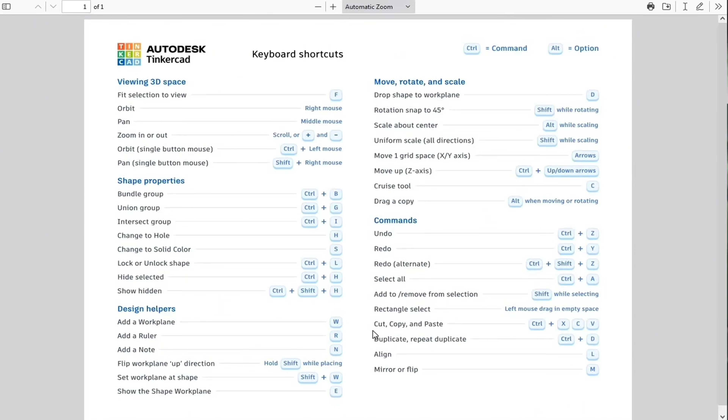Now I noted right now, the new Measure tool is not on here yet, but I'm sure it soon will be. This is a very handy thing to have under your keyboard. It will show you all the different keyboard commands. That'll make working in TinkerCAD quite a bit faster. Let's jump back to TinkerCAD here. Let me show you what this new Measure tool is all about.

Let's go ahead and get rid of this text here. So I have a number of different objects here on the workspace. Now I think some of you are familiar with the ruler tool up here. And if you place the ruler tool down on the workspace here, it provides a lot of flexibility and functionality as far as measuring different things. I did a whole 4 or 5 part series on some of the different things that you could do with the ruler tool, but the Measure tool is a little bit different.

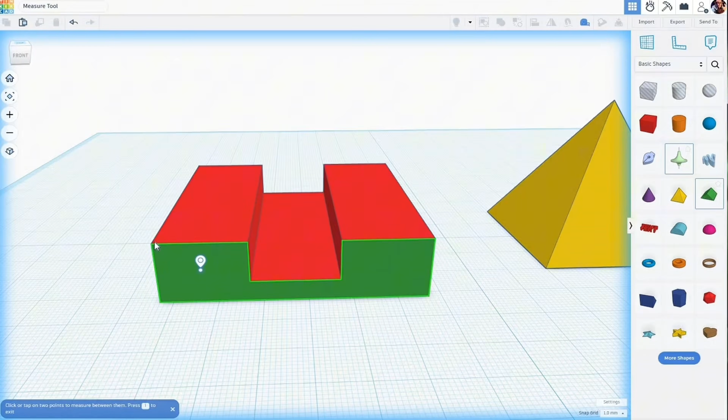But this is about the new Measure tool. So if we come up here and we click on this, you'll notice the screen gets kind of a blue background or a blue hue to it here. And what we can do is place our first dot on a side, on a corner, on an edge. So let's say, for instance, I wanted to know the size of this gap between these two edges.

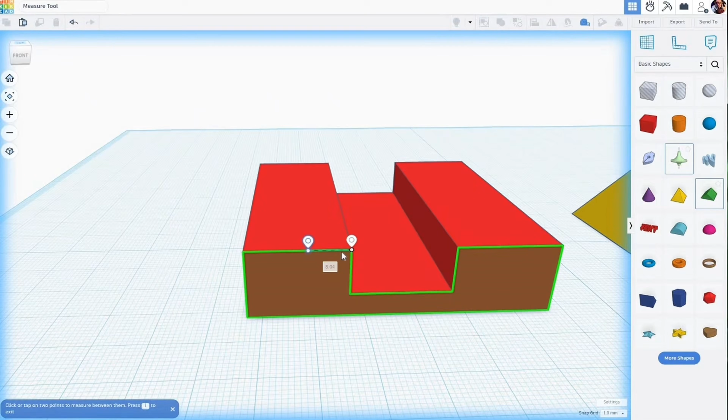So I could come over here, I could put this on the corner. We'll drop that right there. Whoops, let's do that over again. You can click away to get rid of it. I'll hit M on the keyboard. We'll do it again. Put that right there. Stretch it across. Left mouse click again. And note that that says 20 millimeters.

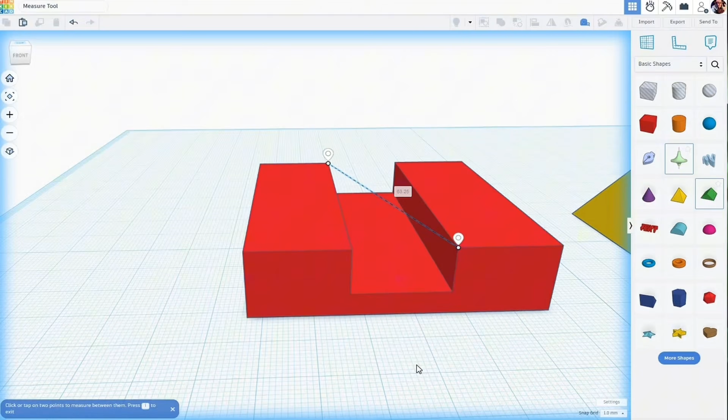Now you can also grab one of these ends. You could move it. Let's say I wanted to know the diagonal here, 63.25. Or if I wanted to know the length, right there, that's 60 millimeters, and I know that to be the case. See, if I just click on the object here, I get the normal dimensions. See, this says 60 millimeters here.

You can also do this between objects. So M on the keyboard again. Let's say I put it at the top of this pyramid here. And let's say I wanted to know the distance to this edge or to this corner. Right there. Or I could move this endpoint, move that over to here. That's 56. And there's some practical uses for this. For instance, this pyramid here.

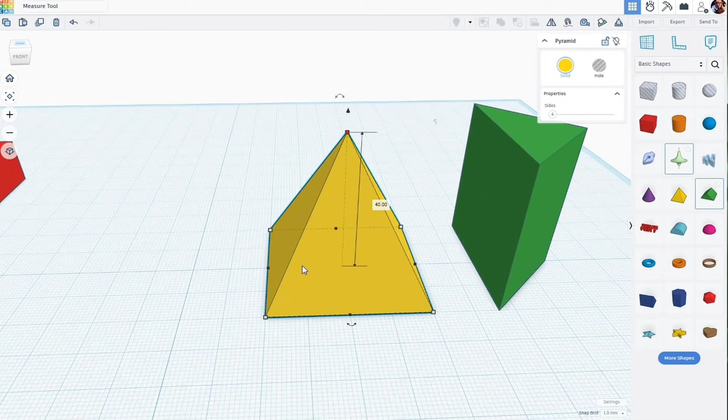Let's go ahead and move this object out of the way. Let's say I wanted to put a flat cube on this side of it here, and I wanted it to go from this bottom edge to this top point. Well, just using the standard tools in TinkerCAD, I know that this is 40 millimeters wide. I know that this is 40 millimeters high, but I really don't know what the distance is from this edge to this top point. Well, we can do that with the new Measure tool.

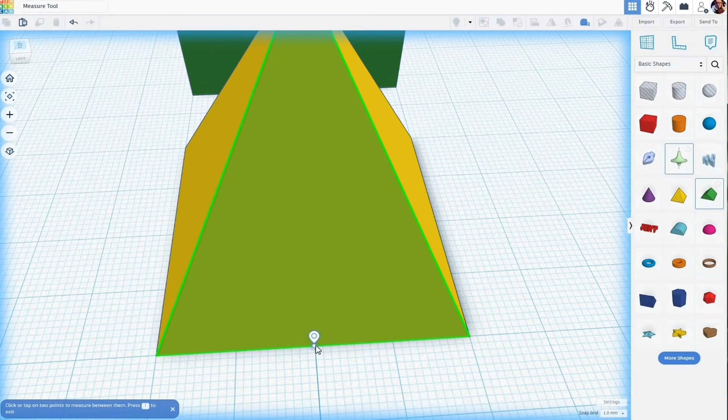Now notice I've taken this pyramid and I've kind of centered it on this dark line here. So I'm going to go ahead and use the M on the keyboard. I'm going to put my first point down at the bottom here. Zoom out. I'm going to put it on this top point right there. And it says 44.72. So let's make use of that.

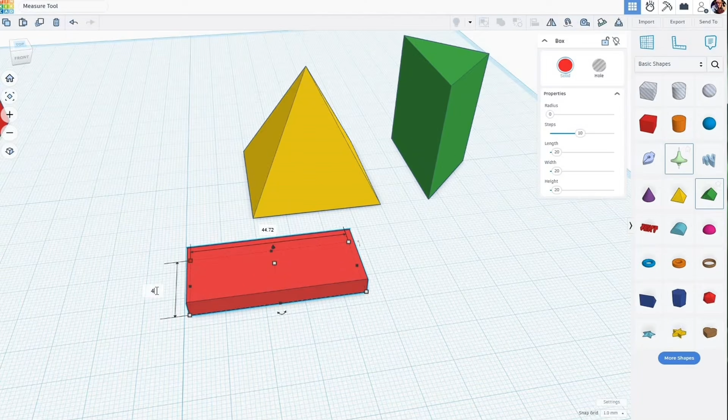44.72. Let's bring out a cube here. Let's make this 5 millimeters high. Make this 44.72, and we'll make it 40 millimeters wide. There we go. Now while that's selected, I can use C on the keyboard to get into cruise mode. I'm going to take this, I'm going to put it on that side.

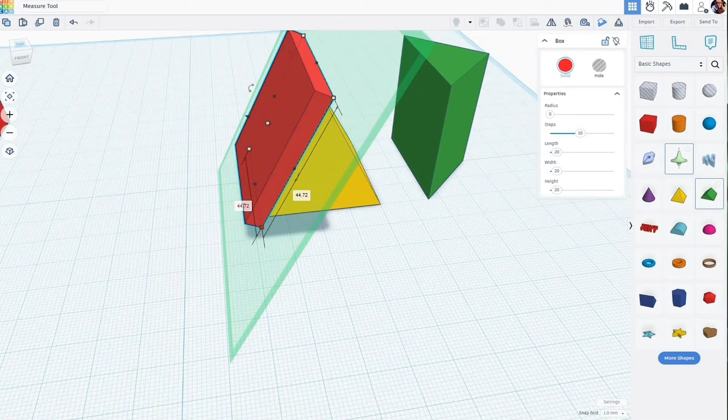But let's change this dimension here. That's 44.72. And this dimension is 40. There we go. Okay. Click away from that. I can use the work plane tool here. I'm going to put the work plane on the side of that pyramid. I'm going to zoom in here. Drop that right there.

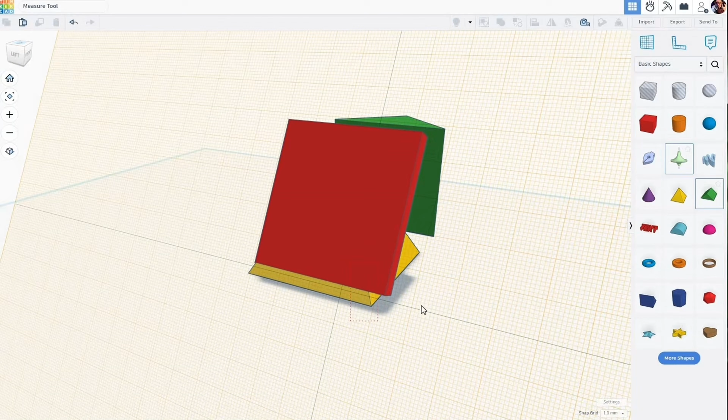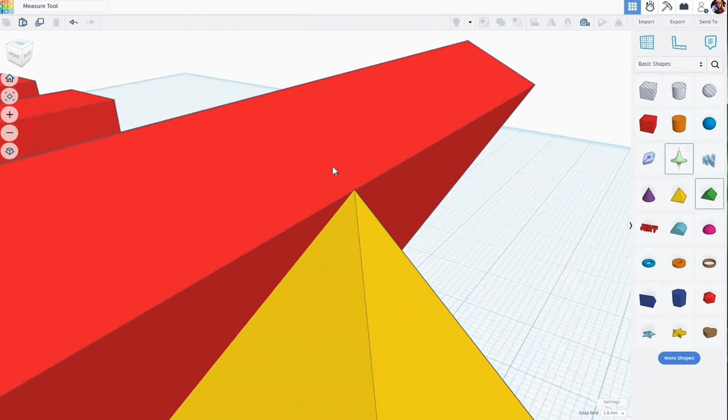All right, I can select the two of those now. L for align. I'm going to click on the pyramid to make it the master. It won't move. Bring that down here. Going to center it that way. I'm going to hit W and put the work plane back on the default work plane again. And would you look at that? I've got it centered on there. The length of that cube is as high as the top of that pyramid.

So that's the new measure tool. M on the keyboard, or it's this up here, and you can just drop points where you want to measure from. Very quick, very easy. So, big shout out to the folks at AutoDesk. You asked and you shall receive.